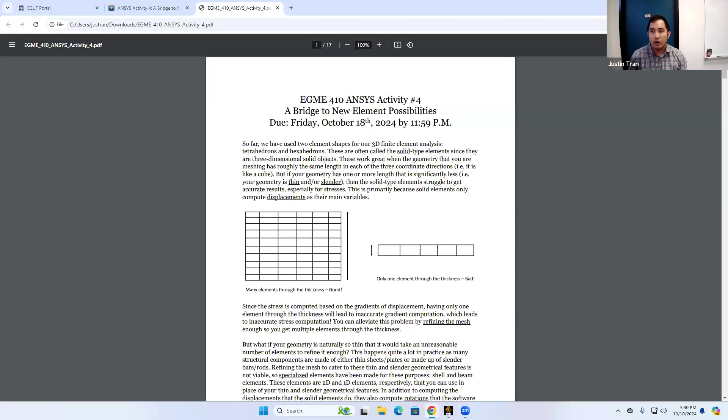As always, the instructions for this activity are available on Canvas. If you haven't done so already, go to Canvas, and you'll see that activity 4 has been activated. You can go and download the instructions, and you're going to need the CAD file too. For this one there's just one file: the bridges file, Bridges.igs.

So we're going to start like we usually do. We're going to open up ANSYS Workbench, and just like we did before, we're going to open up a static structural simulation. We're going to take static structural and move it over to the side, and then just like we did previously, we're going to import in our geometry. Right click on geometry, go to import, go to browse, and open up the Bridges.igs file. Everything pretty standard so far.

If you open up this geometry, I'm not going to do it because it takes a while, so let me show you what it looks like in the specifications here. This is our geometry that we're going to be working with. It's basically just a very basic kind of bridge. We have a road that's in black right here, and all the supporting beams and supporting structures for the bridge are going to be on this side. If you look at this geometry, you can see there's a lot of aspects very similar to what we've been talking about with beams.

For instance, if you look at the road, it's just a very thin plate. It's colored black as if it were asphalt, but it's just a very thin plate. Right now, as it is, it's actually a three-dimensional part, so if you were to try to mesh this, you'd probably mesh it with hexahedrons. But just like we talked about, for a very thin part like this, it really benefits us to turn it into a shell.

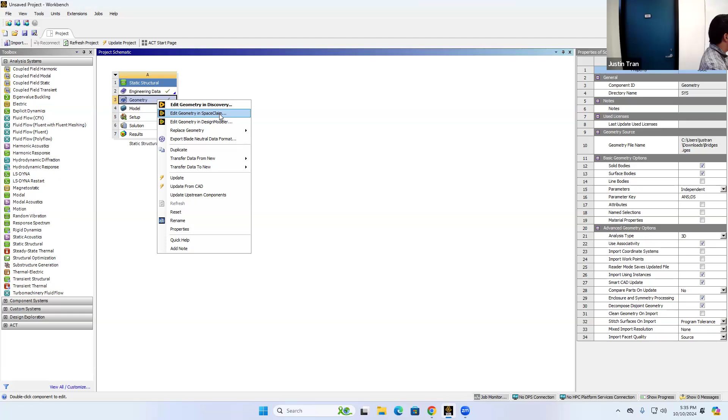Before Discovery came out, SpaceClaim used to be the new and improved CAD software within ANSYS that they were trying to push everyone to use. For this activity, it's the best one we can use to make shells and beams. So let's go ahead and click on Edit Geometry in SpaceClaim, which will open up a new program called SpaceClaim.

I picked this geometry for a few different reasons. The first reason we already talked about - it's kind of perfect for turning into shells and beams because it has a lot of very thin and very slender structures. I also picked this geometry because it's not the cleanest geometry, and you'll see why when we open it up, where the parts themselves don't really fit together all that well.

It's a little hard to tell when you look at the entire geometry like this, but you'll see that once we actually start working with it, there will be some parts that we need to modify and edit, just to make sure it does what it needs to do.

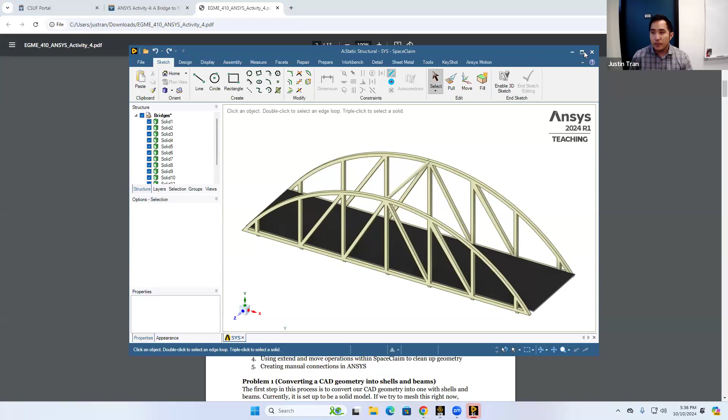If you open up SpaceClaim, you should be able to see the geometry like this. The controls here are very similar to all other parts of ANSYS. If you want to rotate, hold middle click on your mouse and rotate around. If you want to pan, hold control on the keyboard and click the middle mouse button, and you can pan left and right. We'll be using this to modify the geometry.

Any questions so far? Was everyone able to open up the geometry in SpaceClaim? Okay, let's go ahead and get started.

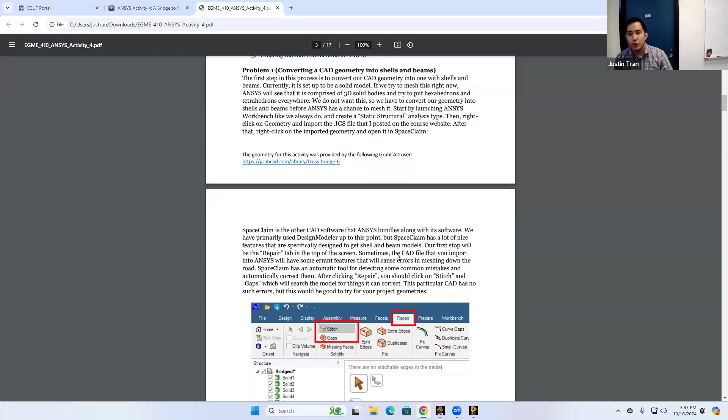There are quite a few steps you need to do in order to prep a geometry for shells and beams. We're going to do a few introductory steps just to make sure our geometry is okay. The first step to modifying a geometry for shells and beams is to try to repair any kind of gaps or holes that you may have in your geometry.

There's a feature within SpaceClaim to do this automatically. If you go into SpaceClaim, down here you can see there is a part of the interface called Repair. We're going to go up there first.

Okay, the first thing we're going to do is click on this button for Stitch. What Stitch is going to do is that if there are any gaps or weird sections of your geometry that don't quite fit together, Stitch is going to catch them and stitch it together into a single body. So you're going to click on Stitch.

After you click on Stitch, ANSYS actually goes and scans the entire part of your geometry to find any problematic areas. In this case, there's no problematic areas for this geometry, so there's really nothing to fix.

But if there were something to fix, after you click on Stitch, this little green check mark here is going to become highlighted. If that green check mark becomes highlighted, you can just click it and it'll automatically repair any gaps you may have in your geometry. For this case we don't have any of those things, so we can just leave it. But it's always good to check, right?

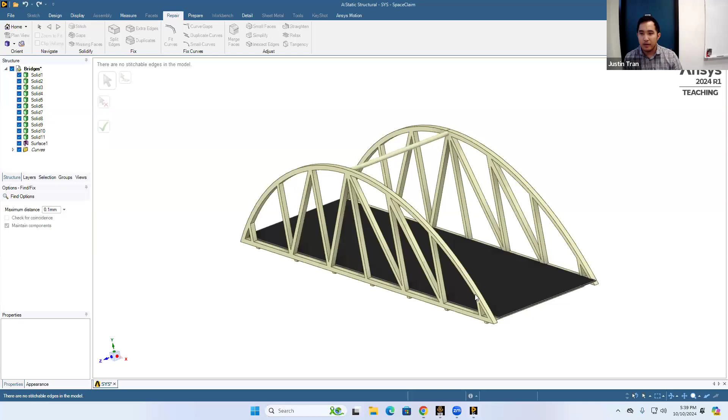So the next thing we're going to do is perform a mid-surface operation. Remember we talked about this on Tuesday. A mid-surface operation is basically the main way that you're going to transform thin parts of a CAD model into a shell. So the way to do that, you're going to come up to the top of the screen here.

There is a button called Prepare, so let's go ahead and click on that. Once you're in that Prepare tab, there's another button called Mid-Surface. If you mouse over the mid-surface operation, it gives you a little tooltip, and you can see it creates a mid-surface from a group of offset surfaces. So let's go ahead and click that.

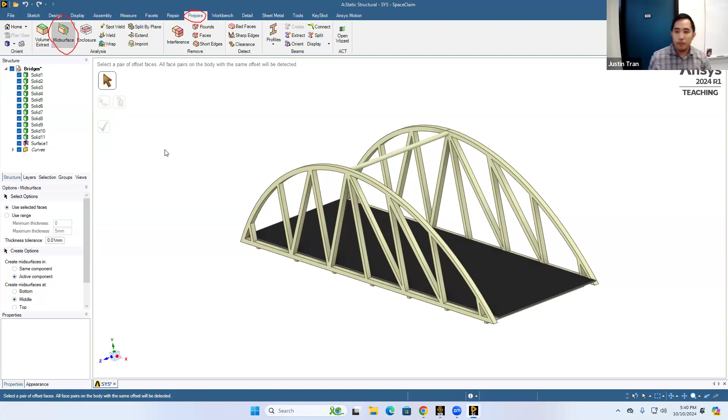Now the next step to create a mid-surface is to select the two parallel faces that you want to delete and replace with a shell. Let's start with the road here, since it's the most obvious thing we can turn into a shell, because you can see it's super thin already. So with the mid-surface operation highlighted, you're going to click on the top of the road.

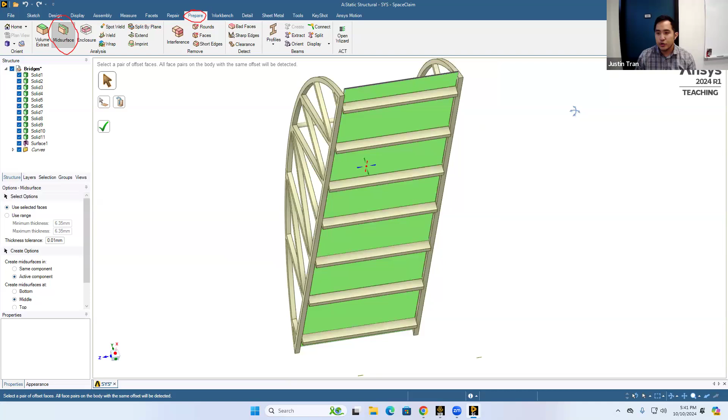It's going to look like nothing happened, but ANSYS did actually log that. With your second click, you're going to click on the other side of the road. You can rotate downwards to make sure you click that one. What should happen is after you click the first one, it should become translucent, and after you click both sides of the road, one side will be blue and the other green. That shows you the two surfaces you want to create a mid-surface from.

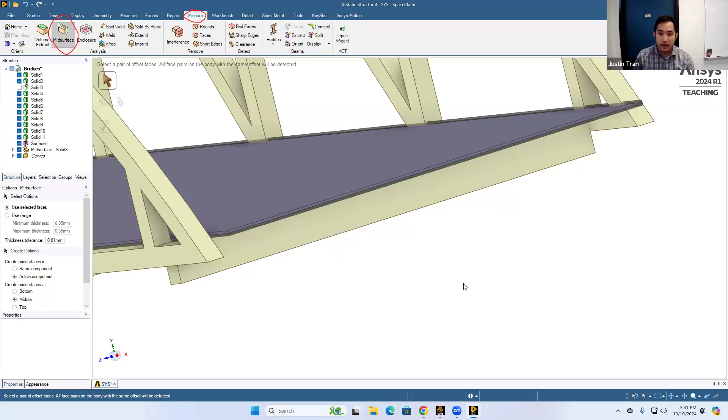And so this is exactly what we want - we want to create a mid-surface from the top and bottom of the road. Once you're ready, go ahead and click the green check mark for create mid-surface. Before you click away, you can see a little bit of the operation that was done. It's a little hard to see on this road just because it's so thin, but what you should see is that we've lost this thickness, and it's now been replaced with the shell.

So if I click away, you can see now that our road is just a very, very thin shell. In fact, SpaceClaim has made the surface kind of translucent to highlight that for you.

Any questions on this so far? Is everyone able to make a mid-surface of the road?

Okay, let's do the same thing with the two sides of the bridge itself. Even though the size of the bridge looks like we could turn these into beams, in this case we're going to turn them into shells so that we can retain as much of the areas as possible. Plus, transforming it from a 3D model to a shell already saves us a lot of cost. So there's no real reason to go all the way to a beam.

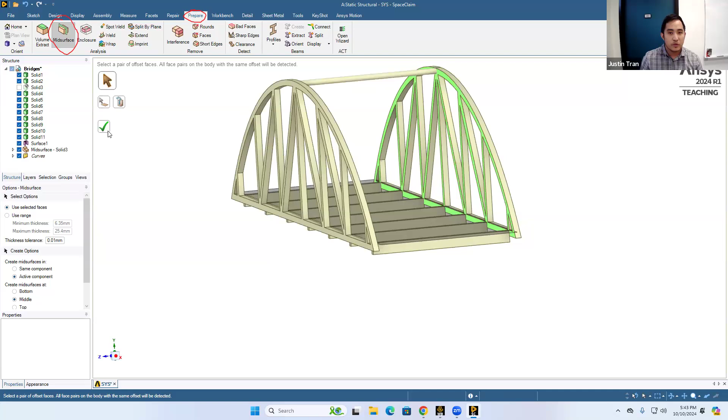Just like I did with the road, I'm going to click on one side of this right side of the bridge, then click on the other side. You can see it's turned blue and green - blue on one side, green on the other. So I'm going to click on the green check mark, and that's going to create our mid-surface.

It's a little bit easier to see once you do it on the side of the bridge. You can see now that our side of the bridge here is a very thin shell, as opposed to having its thickness from before.

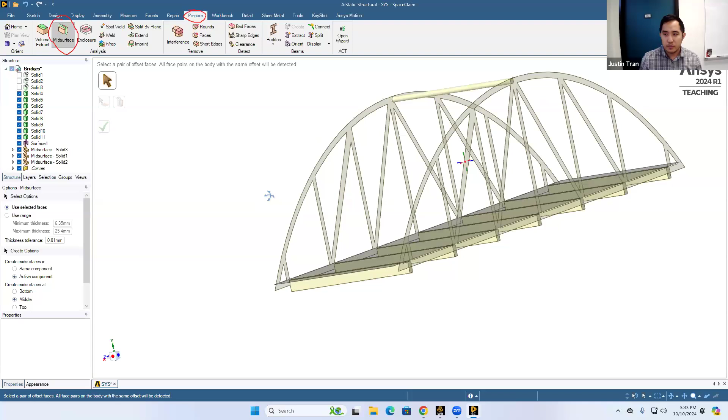All right, we're going to do it one more time on the other side of the bridge. You can see here I've clicked on the inner surface and the outer surface - both of those are perfectly parallel to each other. Then I'm going to hit the green check mark, and now we've turned parts of our bridge into shells.

All right, so that's the easy part so far. Everyone able to get shells on all three surfaces there? Cool, all right. So that's shells in a nutshell.

So now the next thing is we need to transform these slender parts into beams. You can see we have quite a few slender parts here - we have this top beam right here, and I think 7 beams on the bottom.

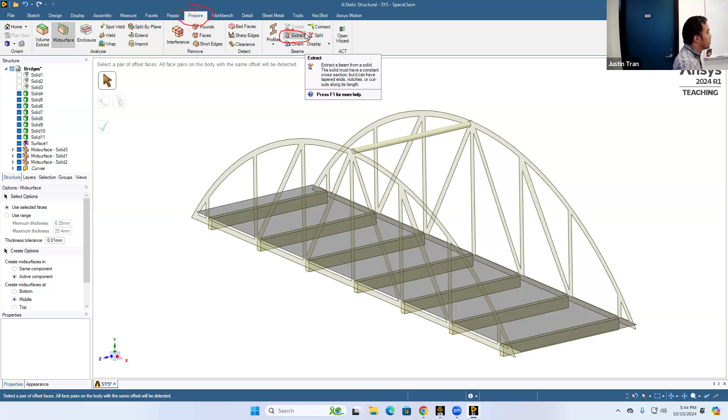To create a beam, you're going to go to the Prepare tab, and there's a small setting here called Extract - we're going to use that tool. If you mouse over that extract tool, you can see that it extracts a beam from a solid. The solid must have a constant cross section, but there are some things you can do with it too, so you can have some tapered ends. So I'm going to click on extract.

Once you click on the extract tool, you basically go into extract mode, and you can check right here - you should see a tooltip that says click a solid to attempt to extract a beam from it. From here it's very easy - you just point to the parts of the geometry you want to transfer into a beam, and click with your left mouse button. You can see after I click this, it transformed into a beam.

You're going to do that for all of the beam surfaces on the bottom as well. Be careful with your mouse - don't click on the road, you don't want to transform the road into a beam. And you're going to do that for all of the supporting beams.

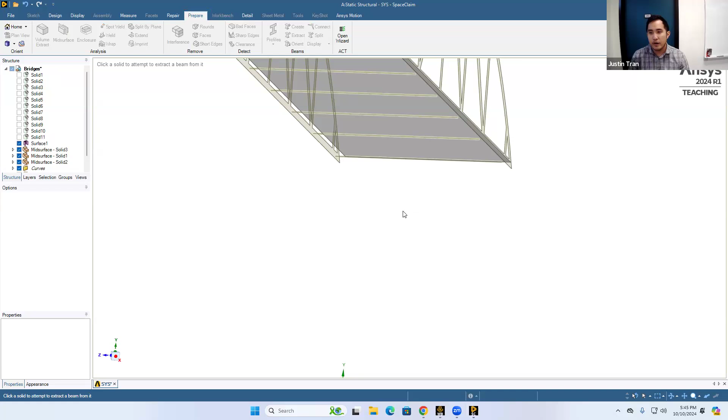All right, so with that, we're done transforming the geometry here. You can see that none of our parts of the geometry have any volume to them at all - they're all either 2-dimensional shells or 1-dimensional beams.

Any questions on this so far? Okay good, all right, so we should be good, right? And we should be able to take this into ANSYS mechanical and start meshing and boundary conditions.

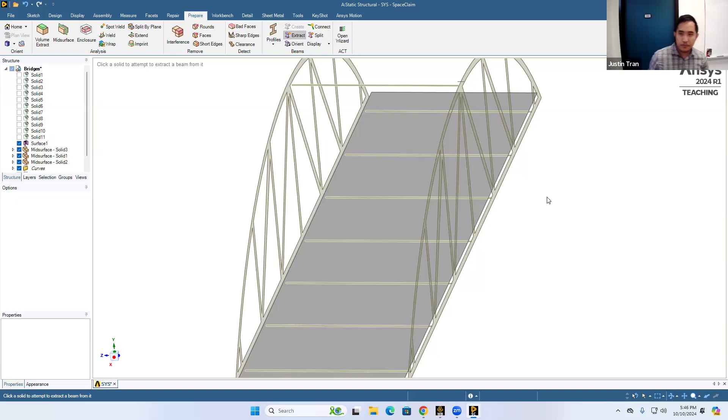Well, not quite. Remember when I mentioned that transforming geometries into shells and beams is going to leave a lot of holes and things to fix in your model. So to illustrate this, let's zoom in on the side of the bridge right here, okay?

Remember, we transform the sides of the bridge by a mid-surface operation. Because of that, we've eliminated the thickness between the bridge and the road, so now we have this big gap. If you zoom around on the bottom, you can see there's a gap as well, so the road is no longer resting on the supporting beams, it's just floating in space. That's not good.

We don't want this. We want to fix this so that all the parts that should be touching each other and making contact are actually doing so. Let's come back to the specifications here.

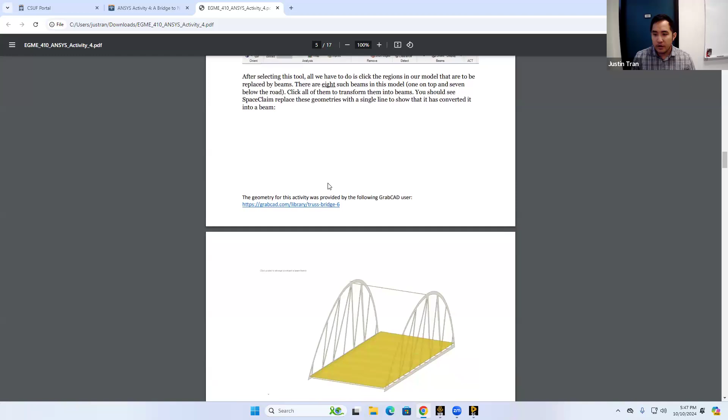There are a few tools we can use to help with this. One of the most useful tools is called the extend tool, which is in this prepare tab. It's right there.

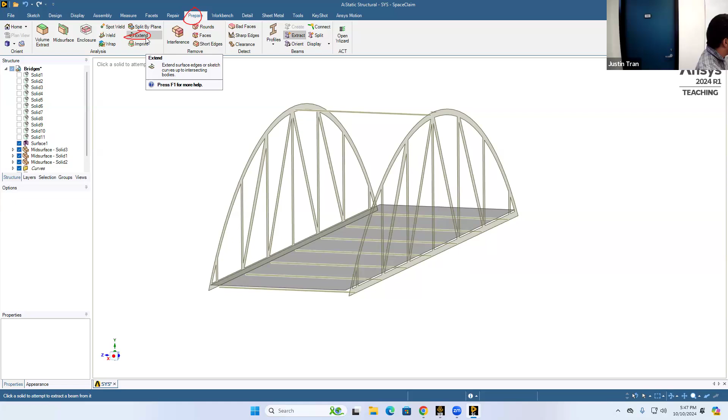What tends to happen a lot when you create shells and beams is that when you eliminate the thickness of parts, the parts are not as connected as they should be. So one easy way to fix this is to simply extend any beams or surfaces to contact anything that it needs to. That's exactly what extend does.

Extend will extend a surface or edges to make sure it intersects with its closest body. Let's go ahead and click extend. You'll see it opens up some options on the left-hand side, and to confirm the extend, we use this green check mark here.

Right now, when we click the extend tool, ANSYS is going to think that nothing can be extended, even though our eyes tell us something different. The reason is that ANSYS is only checking for intersecting surfaces within 10 millimeters of each other, and something has to be within 10 millimeters of contacting something else for this extend tool to work. This bridge is a bit bigger than that, so we're not going to get any extensions from 10 millimeters.

So let's increase this. I'm going to extend the maximum distance to 50 millimeters instead. After doing so, hit enter, and you'll see that ANSYS will suddenly find areas where it can extend the geometry. All these parts where it can extend are highlighted with a little red circle.

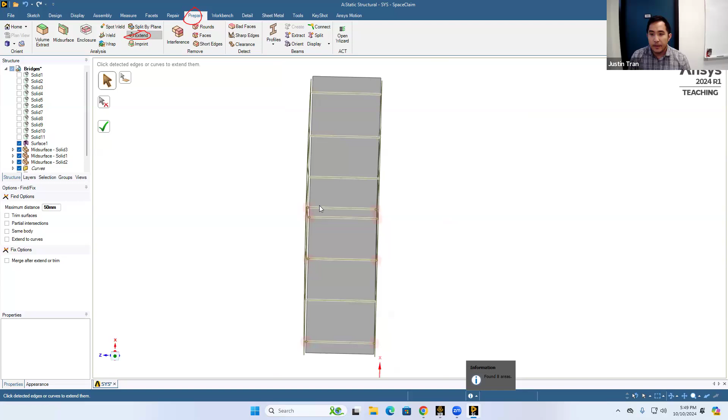Let me give you a good view of this so you can see what's happening. I think that's a good view. Once I click extend, this beam here is going to be extended so that it contacts the bridge, exactly like it was before. I'm going to hit this green check mark.

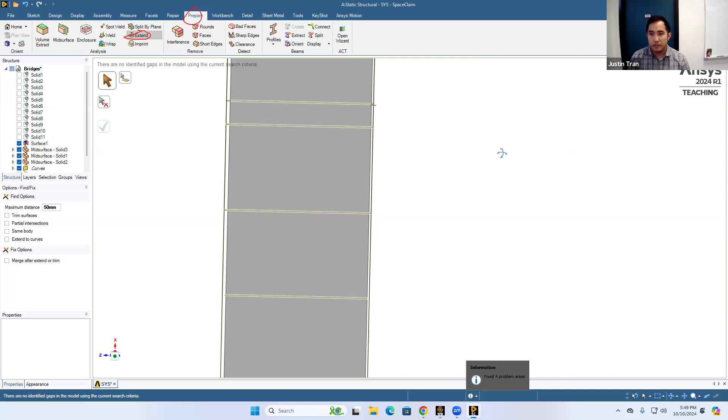After hitting that green check mark, you can see these beams are now extended to hit the bridge. Notice that it only does it on one side of the model, so you have to hit the green check mark again, and that's going to extend it to the other side as well.

So some of our beams are fixed, and now those beams are contacting the bridge again, so those beams are good too. But you'll notice the extend tool didn't work for all of the beams. Let me turn off the road here. To turn off the visibility for a part, you can uncheck it in the project outline, so I'm going to uncheck the road.

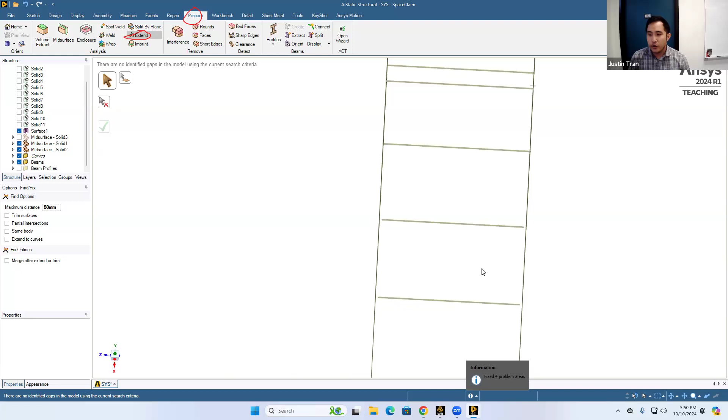We'll bring it back in a bit, but this is just so we can illustrate the beams here. If I rotate the view around, you should see that some of the beams are connected to the bridge as they should be, but some of these beams are not. This beam failed to extend to connect, so it's still floating in midair. So why is it that some of these beams were able to connect to the bridge, but some were not?

To answer that question, let me go ahead and zoom in from this way.

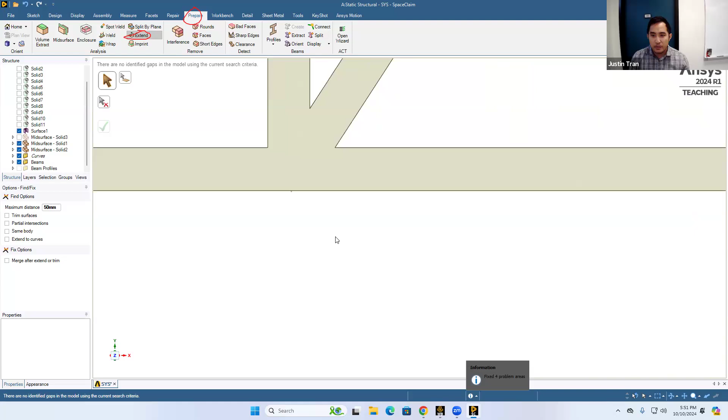So now we're looking at the bridge from the side, and let me zoom into the part on a beam that did not fully connect with the bridge itself. To show you how I'm getting here, I'm focusing on this beam, because that was one of the beams that was not able to extend and connect to the bridge.

Let me clear this and rotate around to zoom in on this beam. When you zoom in really close, we're looking right down the barrel of the beam, and you can see there's a gap between the beam and where it should contact the bridge. It's not that big, so you can only really see it when you zoom all the way in. But the fact is, this beam was not perfectly aligned with the bridge to begin with.

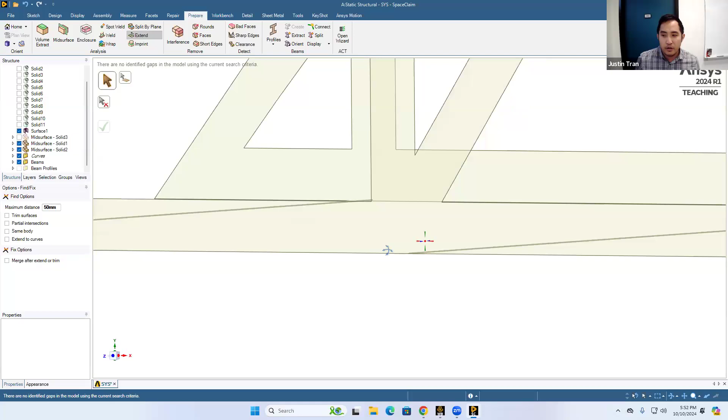Before, when this model was a 3D solid model, it kind of masked this fact because the beam had its own thickness. But now that we've transformed the beam into a one-dimensional structure, this gap is all the more important. So right now we're not able to connect this beam because it's not even in line with the bridge. What we need to do is move this beam upwards, because we know it should be contacting the bridge, so we can properly use the extend tool. Any questions on that?

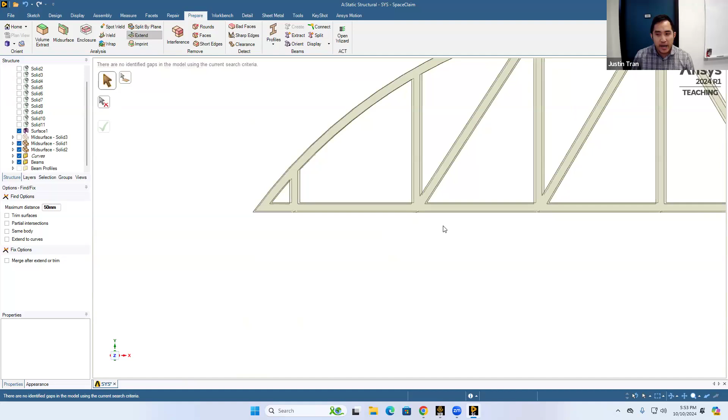This is the part where we need to actually modify our geometry. You can see there are 4 beams that we need to do this for. On my screen, that's one beam here on the left, which is clearly not connected, this one here, and this one here. You can start with any of these — we're going to do this to all 4 eventually, but you can start wherever you want.

So what we need to do is find out how far off we are, because we can see from this view that this beam is clearly not connected and not in line with the bottom of the bridge, but we need to know how far we need to move it up. The nice thing about ANSYS SpaceClaim is that it has a nice measurement tool. If you go to the top of the screen, there's a tab called Measure, and we want to measure the vertical offset from the beam to the bottom of the bridge.

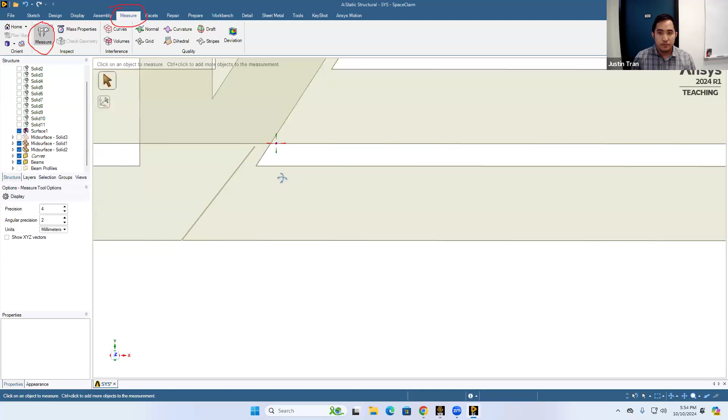To do that, you use this measuring tool — click Measure, then click on both structures: the beam itself that you want to move. When you click on the beam, it gives you the length, which is 3175 millimeters. But we want to find out the vertical distance between this beam and the bottom of the bridge.

To do this, you have to be a little delicate. Hold Control on your keyboard because you want to select multiple surfaces. After you've selected the beam, hold Control and click on just the bottom edge of the bridge — you don't want to click the entire thing, just this bottom edge. That will open up this measurement window right here.

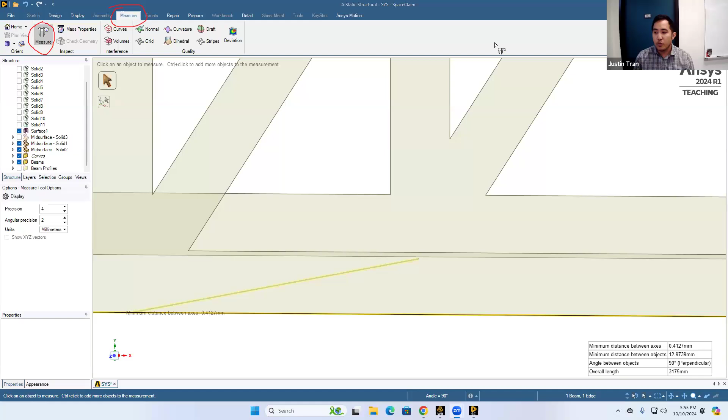So it's going to tell you some of the distances measured, but in particular we want to know the y distance, the y offset. The y direction you can see is vertically upwards.

To show the y offset, with the measurement tool highlighted, come to the left-hand side of the screen, and you can see there's a setting for show XYZ vectors. Let me go ahead and do that.

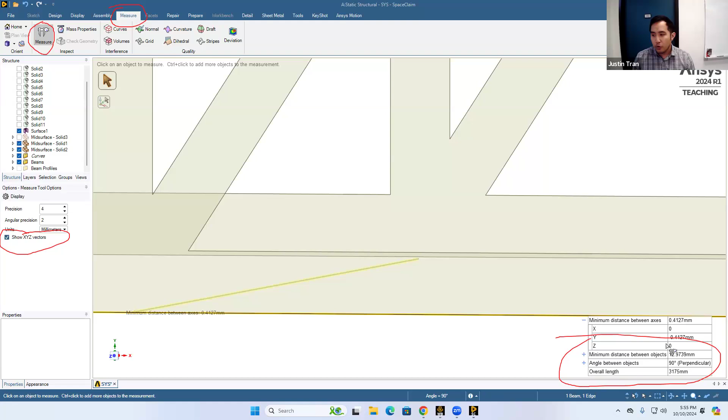After you select that XYZ vector, let me clear my drawings here so you can see that the vertical offset between these two is about 0.4127 millimeters. So it's very close, right? It's less than half a millimeter away, but we still need to move it up.

Any questions on how we measured the distance? Kind of the unfortunate thing about this CAD model is that all of the beams are all slightly off by a different amount, and so we have to measure all four of those beams. We're going to have to repeat this a few times.

Okay, now we know the amount that is off, so let me go ahead and write it down, in psychopath handwriting on the screen right here. We know that the vertical distance between the beam and the bridge right now is 0.4127 millimeters. That means we need to move this beam upwards by at least this amount.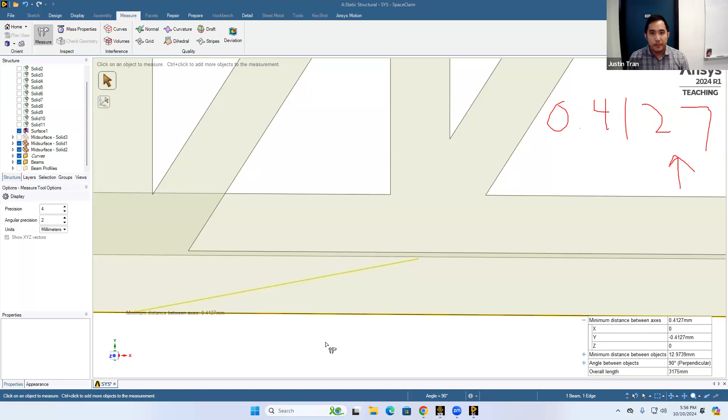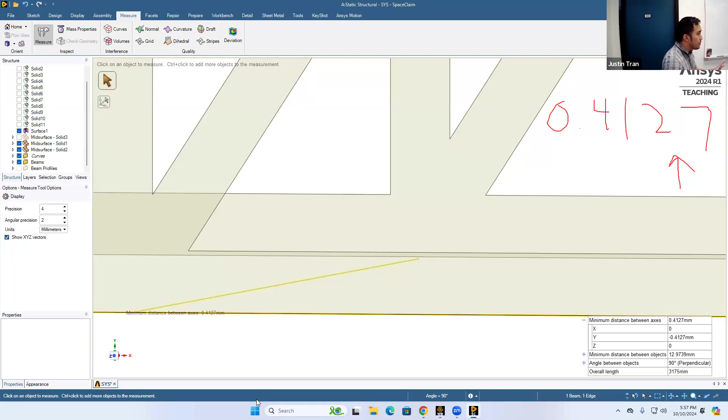To do this, you have to be really careful here because we're going to actually be modifying the CAD file now. You want to make sure you're only modifying the parts you want. In this case, the part we want to modify is just this beam itself, but you want to unclick the bottom of the bridge. We want to keep that the same, so we don't want to touch it. The only thing we want to change is moving this beam upwards.

So you want to make sure that you unhighlight everything. Click in an empty space, and by doing that you deselect everything. That's really important, make sure that you do that.

We go ahead and move to a better view here. Make sure you don't lose track of the beam that you want to move upwards. So the next part here, we're going to go to the top and click on design.

This design tab is going to let us move different parts of the geometry around to suit our needs, and in particular the tool we're going to use is this move tool right here. If you highlight over this move tool, it's basically going to let you select an object and click on an axis to move it around.

We only want to move this beam in the Y direction, so we're going to click on move. Click on the beam that you want to move here, and make sure you select the entire beam—be careful, don't just select the ends, make sure you click the entire body of the beam itself. Make sure that entire beam is highlighted before you start moving.

The direction we want to move it in is the Y direction, so I'm going to click on this blue arrow, because this blue arrow is in the Y direction we can see here. You click on the blue arrow and drag it up a little bit, and you can see by dragging it up and down you can move this beam as much as we want. We only want to move it up 0.4127.

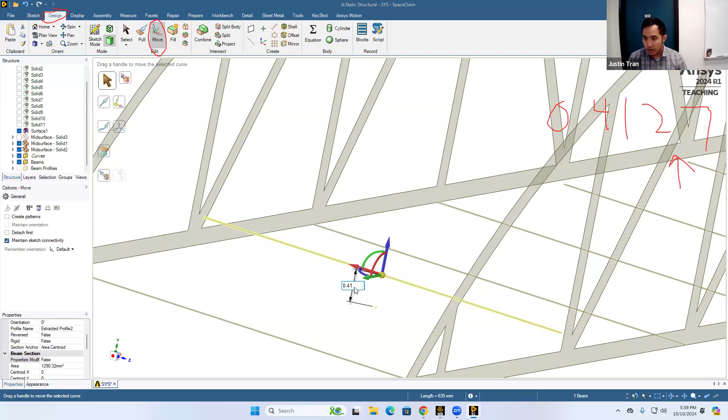I'm going to round up a little bit, because we want to make sure that we're at least intersecting the bridge, so I'm going to round up the amount that we're moving up. I'm going to move it up by an amount of 0.413, and hit enter.

And so that moved this beam up very slightly so that it's now intersecting with the bridge itself.

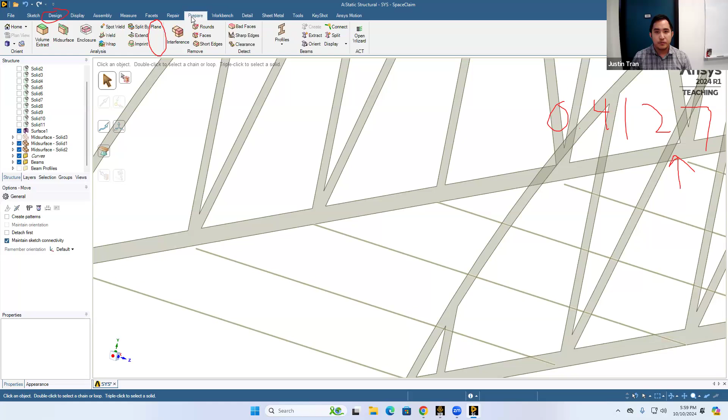To check that your movement was successful, go back to the Prepare tab and click Extend. After clicking the Extend tool, you should see that the two ends of the beams you just moved up are now highlighted because they can now intersect with the bridge itself. I'm going to click on this green check mark, click it twice. So now that beam is exactly where it needs to be, intersecting with the bridge, since we moved it up.

Any questions on this part? All right, go ahead and do that for the other 3 beams. The next part is to make sure all 4 of these beams are connected. We did 1 together, so there should be 3 left. Go ahead and do that on your own. I'll make my rounds now, because this is the part where things get a bit confusing, so if you're having trouble, raise your hand and I'll come help.

Make sure you measure every single one, because every single one is off by a different amount.

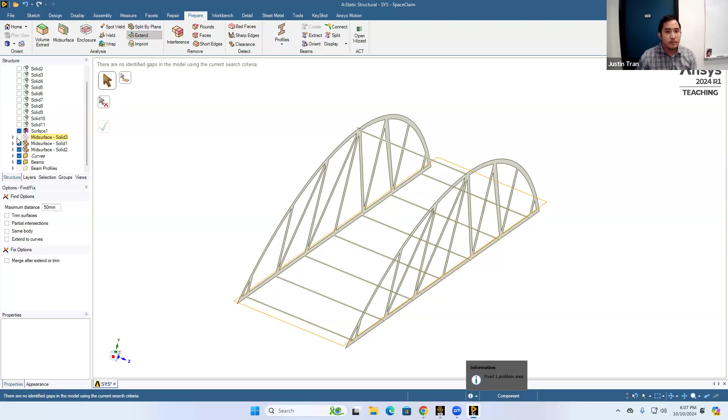All right, so our geometry here is in much better shape than it was before, since all the beams are connected like they should be. So the last step here is to make the road connected as well. The road you can see here is floating on nothing, with quite a big gap between the road and the beam itself. So we need to move the road downwards a little bit so that it's sitting on the beams like it should be.

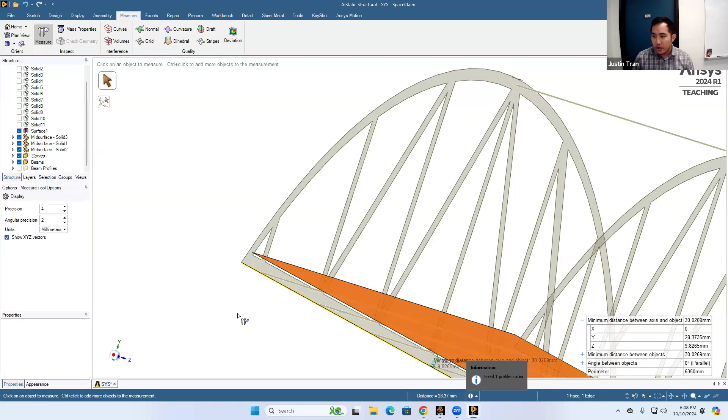Let's use the same procedure as before: let's measure how far off we are by hitting the measure tool. I'm going to click on the road itself - it doesn't matter where on the road you click, since it's just a two-dimensional surface now. I want to align this road to the bottom of the bridge, because that's where we lined up all the beams. So I'm going to hold Control on the keyboard and click on the bottom of the bridge. You can see here that the road is off by about 28.37 millimeters, so we should move it down by about this amount.

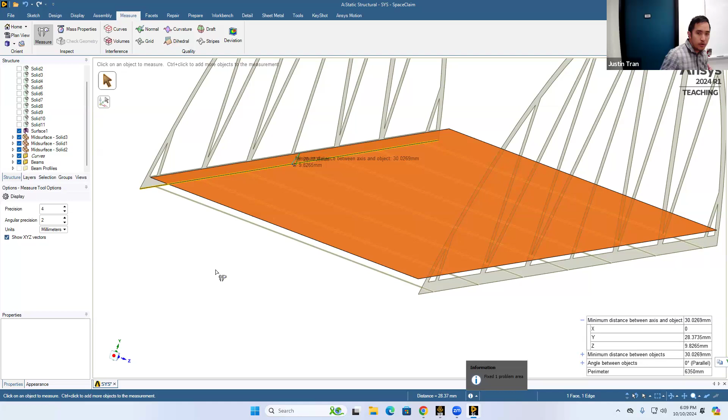This one you want to be a little careful with, because whenever you're moving things around in your CAD model, you want to be aware of which direction you're moving towards. When we moved the beams upwards, I rounded up a little bit to make sure the beams had enough clearance to intersect with the bridge, because they were below the bridge and we had to move them up to be even with it. For this road, we're coming from the opposite direction, so if we move it down too much, we'll have the same problem as before.

So let's say, for instance, we moved it down by an amount of 28.4 millimeters. If we move it by 28.4, the road is actually going to be below the bridge, and we'll have the same problem as before, where the road won't be able to connect with anything - it's just on the wrong side of the bridge. So in this case, I actually want to round down a little bit. I'm going to move it down by an amount of 28.37. Let me write that down so I don't forget.

Okay, so just like before, let me click on an empty space here just to clear the selection. I'm going to go back to the design tab and hit move.

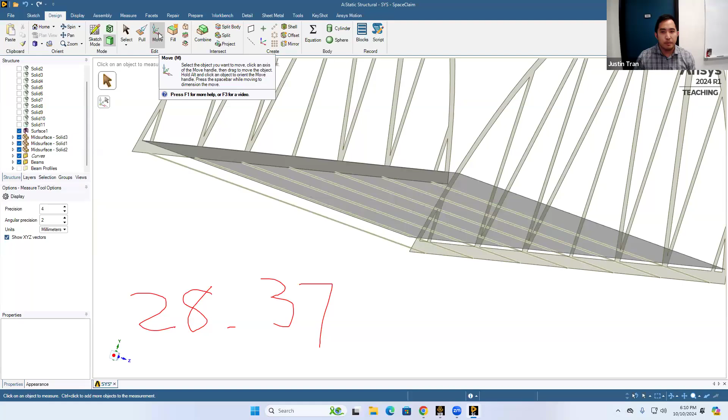Now you want to move the entire road, so make sure you have the entire road selected. Click on the blue arrow, move it downwards, and enter manually 28.37.

Okay, so now the road is moved downwards. You can see now it's basically in the same plane as all the beams.

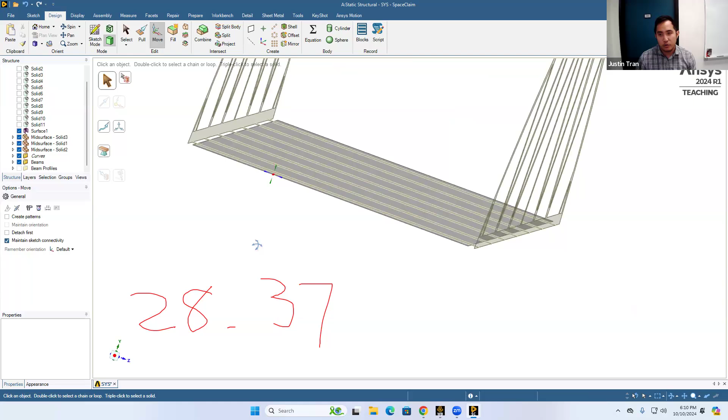Let's do one last thing before we jump into mechanical. Let's extend the road. I'm going to go back up to prepare and extend. After doing that, you should see that the two sides of the road are highlighted now because they're in line with the bridge. I'm going to hit the green check mark.

And so now the road is properly extended to the sides of the bridge. In the end, your geometry should look like this. All the parts have been transformed into shells and beams correctly, and everything that should be connected is now connected. All the beams are connected to the bridge, the road is sitting on the beams, and the road is connected to the two sides of the bridge as well.

All right, any questions on this? Everyone was able to get this geometry to look like this? You moved the road to the edges of the bridge, so yes, everyone's road should be the same. The road should move down by an amount of 28.37.

Cool. All right, and so if your geometry looks like this, we are ready to move on to the next step. And so the next step is going to take place in ANSYS Mechanical.

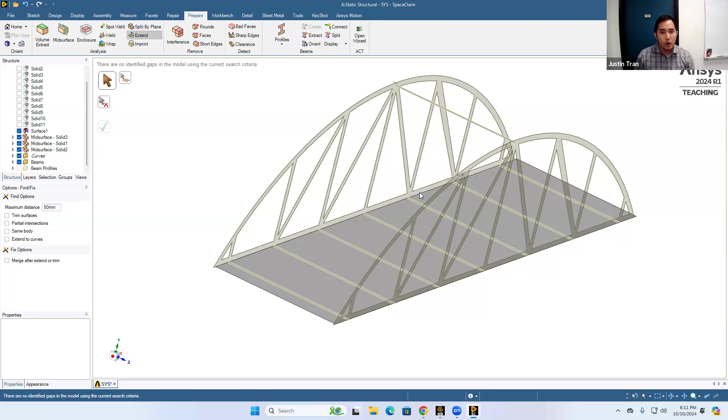So let's go ahead and close out SpaceClaim. Don't worry, all the changes to your geometry have been saved. You don't need to actively save it yourself. So go ahead and close SpaceClaim, or come back into Workbench, and we're going to double click on model here to open up ANSYS Mechanical.

So the next thing we're going to move on to is, well, eventually we're going to do the meshing and the boundary conditions, but first we have to make sure we fix the connections.

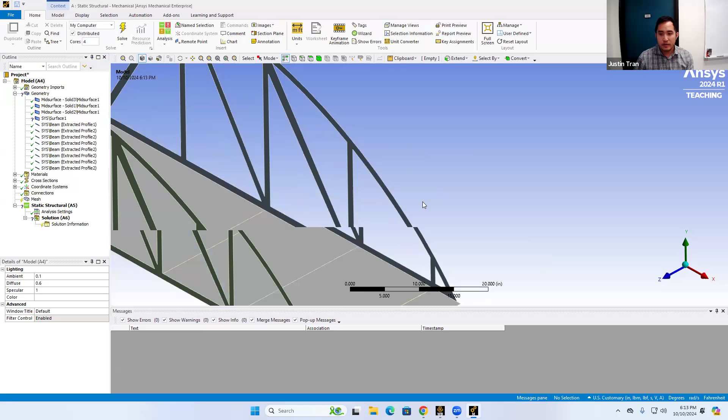All right, and so if you open up ANSYS Mechanical, you should be able to see the bridge that you created. It should be the version of the bridge where you transformed everything into shells and beams. This bridge is going to be really efficient to mesh, and you're actually going to see that when we get to the meshing, it's going to look really good, with very few elements in your mesh.

Okay, I'll give it a couple more seconds, just because that took a while—probably you guys here are taking a while too.

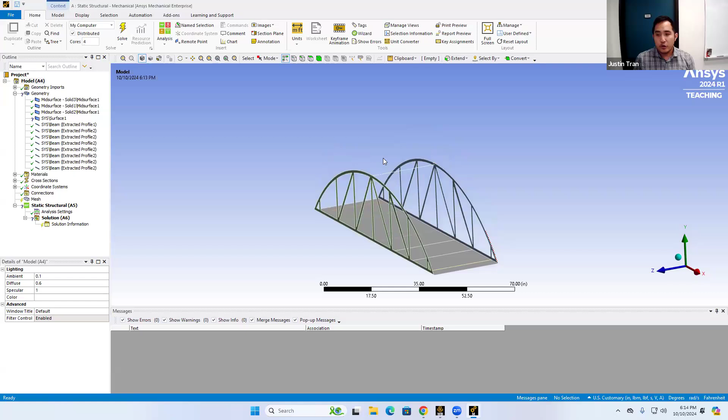So once your bridge is loaded in, you should see that every single shell and every single beam that you created is listed as a separate part in the project outline. This is the most parts that we've had in an activity. Last activity with the signpost, we only had 3 parts: the sign, the post, and that additional surface. So this is a lot more parts than we're used to working with.

One thing you should notice is that there's one part right here that has a question mark, called sys surface 1. If you're wondering where that is, there's an awkward part of this bridge up here, which almost looks like a chopstick that someone dropped and it's just balancing perfectly on the bridge. This is just an artifact from the modeling.

So if it wasn't clear already, this CAD model was kind of clumsily put together, and it wasn't properly dimensioned, as you can see from the beams. This is just another artifact of that.

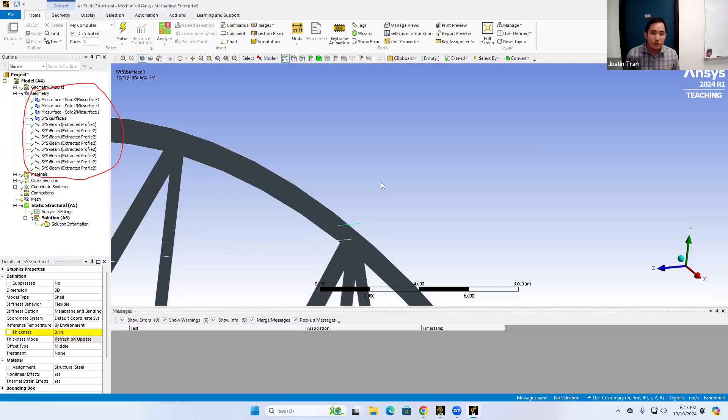We don't need this in the model because this part of the bridge isn't going to be bearing any kind of load, so we can suppress it. I'm going to right click on this surface, the only part here with a question mark, and suppress this body to basically get rid of it. Make sure you do that, otherwise your model will have a hard time meshing.

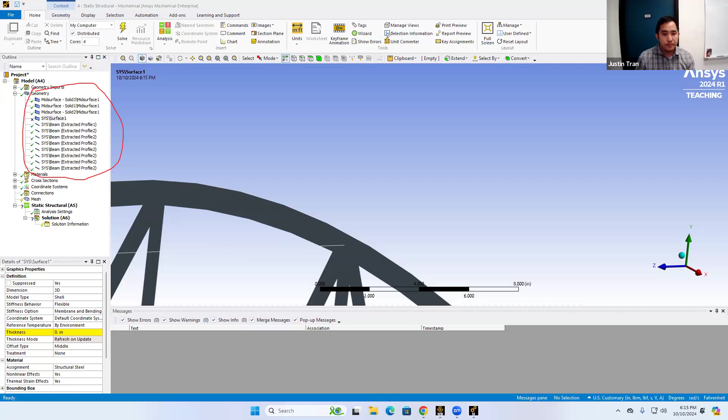At this point we have a familiar situation: our CAD model is all prepped, so we can now go to mesh and generate one just to see what it looks like, using the default settings for now. If you did everything correctly, the mesh should generate quickly. My default mesh here has only 517 elements, which is great because we went through all this effort to transform this geometry into shells and beams, so it makes sense that our mesh is very efficient.

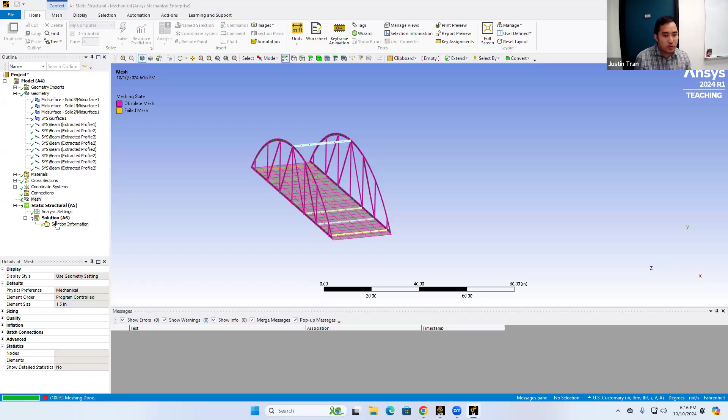We can make this smaller. The default mesh size is about 3.6 inches, so let's reduce it to 1.5. Even with this smaller element size, we still end up with a very modest mesh - the number of elements is only a little less than 1900. We're getting meshes that look very nice. So let's make it even smaller, down to 0.5.

This is the main benefit of using shells and beams - since you've lost that third dimension, you no longer have a thickness or cross-sectional area, so you can make your elements as small as possible for really nice results. With a mesh size of about 0.5 inches, really pushing it here, our element count is about 14,000, which is still very modest in the grand scheme of things. You can see we've done a really nice job with the mesh.

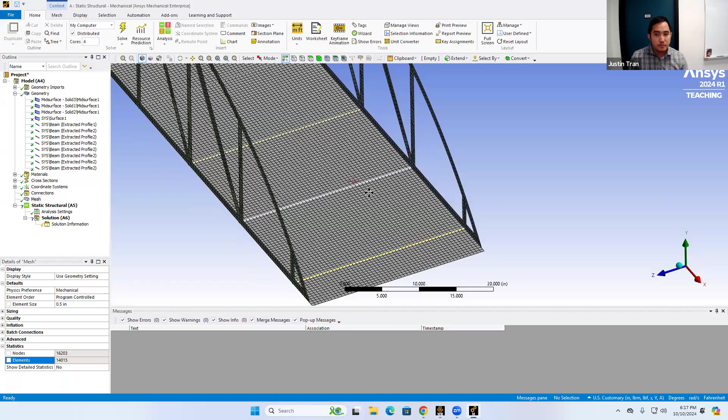So that's great, we're in a really nice position for our simulation. We've taken a geometry that normally would have been very challenging to mesh with traditional tetrahedrons and hexahedrons, and turned it into a very elegant shell and beam mesh. From here you can add boundary conditions, run the simulation, and add result fields to look at. But there's one thing we need to do before that.

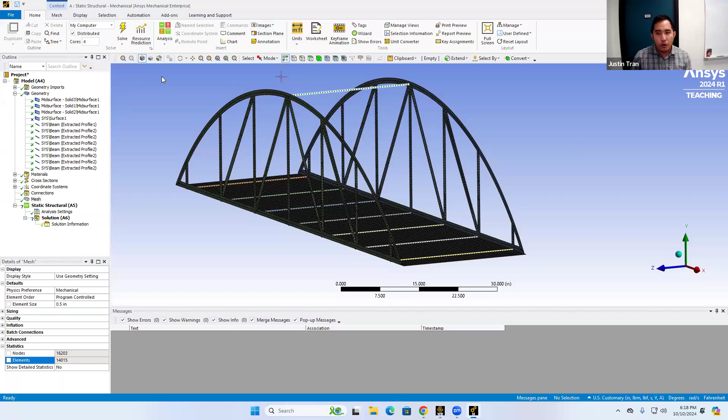We've done some pretty extreme modifications to this CAD file. All the previous connections - parts that were normally bonded together in the assembly - we've lost that information. Now we've repaired the geometry so everything that should be touching is touching, so from a geometric point of view the model is in good shape. But ANSYS doesn't know these parts should be connected since we modified them manually, so we need to specify that to ANSYS. Even though these parts are geometrically close, in the finite element simulation they're not fixed to each other at all. So if you applied a force on this road, it would completely detach from the bridge and the beams, and you'd just get a bunch of crazy results. We need to set these connections.

To set connections on your model, go to the left-hand side of the screen where there's a button for connections. Right-click on connections, and then insert.

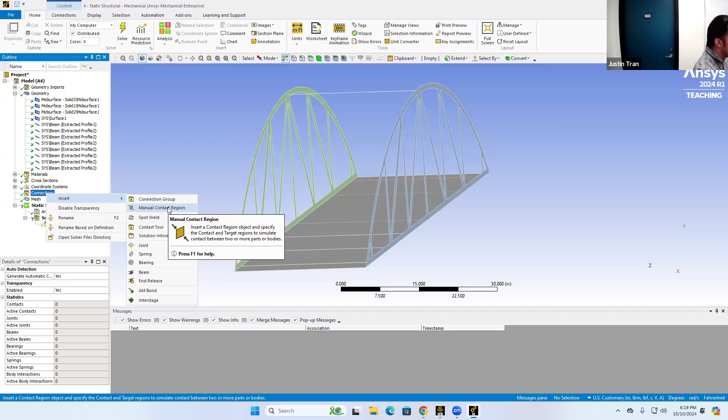And you want to insert a manual contact region. What the manual contact region is going to do is allow you to select two parts of a part, I should say. And then you're going to be able to form a connection between them to tell ANSYS that these parts should be bonded together.

Okay, so let's go ahead and do this. We're going to need to do this a lot, so there's quite a few connections that we need to make. First connection that we're going to do is let's go ahead and bond the road to all of the supporting beams, because ideally this road should have its weight supported by all of the beams below.

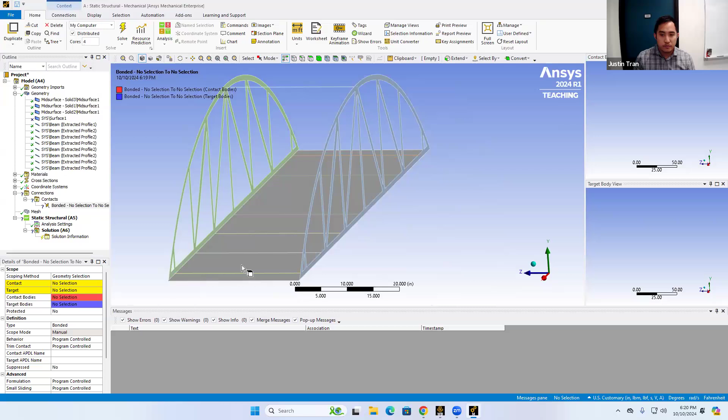So let's go ahead and select the road. Make sure the road is selected there. And on the left-hand side of the screen here, you should see that from the settings on the connection that we're making, there are two things that we need to specify: we need to specify a target surface and a contact surface.

So for this road here, I'm going to set it to be the target surface. With the road selected, you're going to click on target here, and click on apply. And that's going to set the target to be one face, that one face being the road.

And then for the contact, we're going to select all of the individual beams right here, so the beams should be bonded together with the road. Now if you're having trouble selecting the beams just because they're kind of right next to the road here, it may help to change the selection mode within ANSYS.

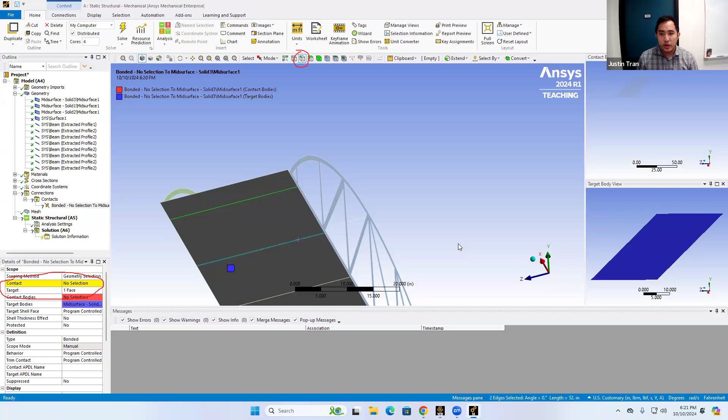All the beams are considered edges here, so you can click on this edge selector, click on edge, and go ahead and click on all the beams here. You want to select all of them, so make sure you hold down Control on the keyboard and click on all the beams. There should be 7 of them, so make sure you click all 7 beams.

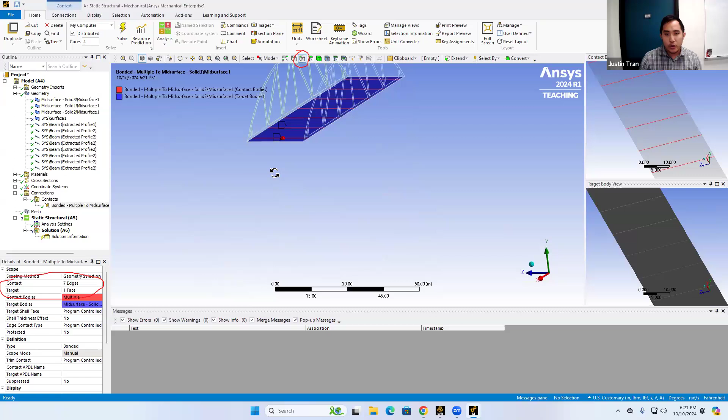And then you're going to apply that onto the contact. Hit apply. And so with that, we formed a bonded connection between the road and all of the supporting beams. Okay, so that's step 1. Step 1 is to make sure that we connect the road to the beams.

Now we've selected this in a way where we've set the target as the road and the contact as the beams, right? And so the first question to ask is, does it matter which is which? Because ultimately we're making a bonded connection between the two. And so it doesn't matter as long as we have everything selected, it seems like it shouldn't matter, right? But there's a reason they call these two things different.

So for a simplified explanation, whatever surface or whatever body that you select as the target, you generally want that to be the bigger of the two surfaces.

So it's a little bit hard to explain why this is without getting into the mathematics. But when you're forming connections or contacts between two different entities in a finite element simulation, you need to have some kind of anchor, basically, and the anchor is the target. So whatever is the larger of the two surfaces, or the larger of the two bodies that you're trying to connect, you want to select that one to be the target.

So in this case, where we're selecting the road and the beams, the road has a much bigger surface area than the beam itself. And so you want to make sure that the road is selected as the target. Just kind of keep that in mind as we set the other connections in terms of which one should be the target and which one should be the contact.

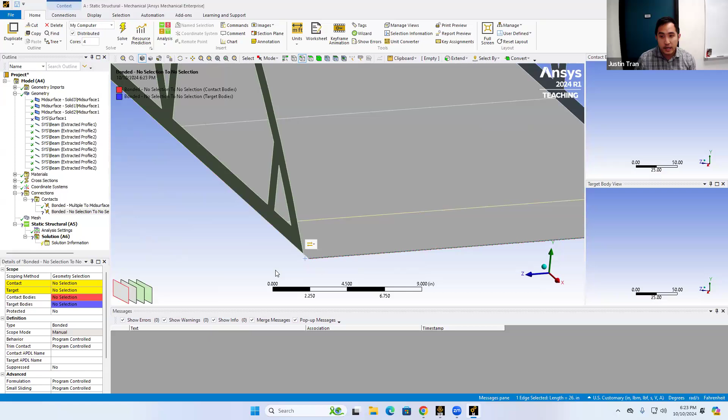Oh, not that edge, let me go to the other side. It may help to hide some parts if you're having a hard time clicking on the correct edge. But the edge I want is this one for the road. Oh, that's for the bridge.

This one's a little tricky because the edges are kind of on top of each other, but there's a section of the road here that overspills past the bridge.

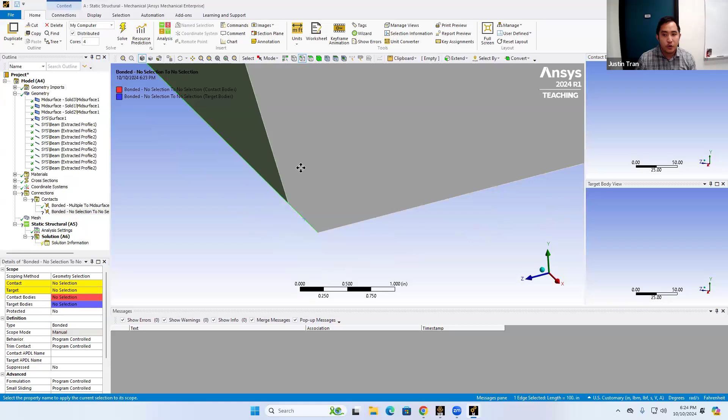So you want to use that to make sure you're selecting the edge of the road itself. This edge of the road is going to be the smaller of the two surfaces, so I'm going to set this to be the contact. And then the target we want to bond this to is the entire side of the bridge.

I'm going to click on surface selecting mode, or face selecting mode, and click on the entire side of the bridge, just like that, and set that to be the target. So now the side of the road is bonded to the side of the bridge.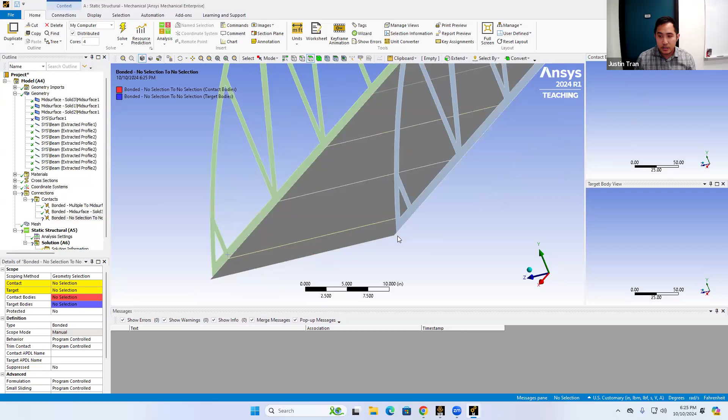I'm going to do the exact same thing on the other side. I'm going to create another manual contact region. Once again, let me select the side of the road here, and use face selection mode. I'm going to select the side of the bridge.

Now we formed a connection between the roads and the bridge itself. There's one more connection we need to make here - technically two connections. We need to make sure the sides of the beams are properly bonded to the bridge itself.

I'm going to create another manual contact region. Since we're in face selection mode, I'll select the side of the bridge and make that the target. So for this connection, we're bonding the ends of the beams to the bridge.

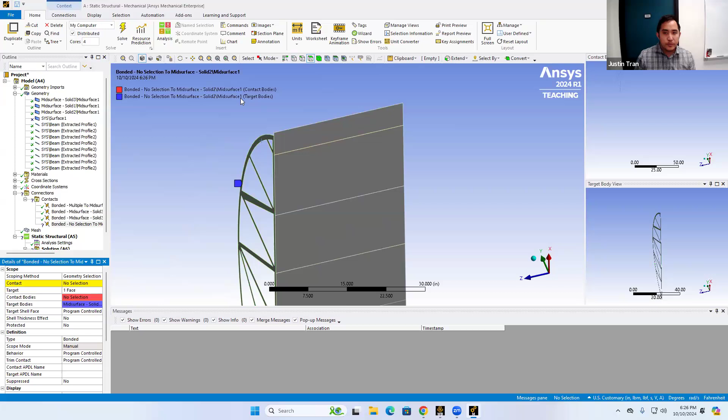I've selected one of the sides of the bridge as the target, and then for the contact, I'm going to select just the end parts of each of these beams. For this, you almost certainly have to click on vertex selection mode, so make sure you have that selected.

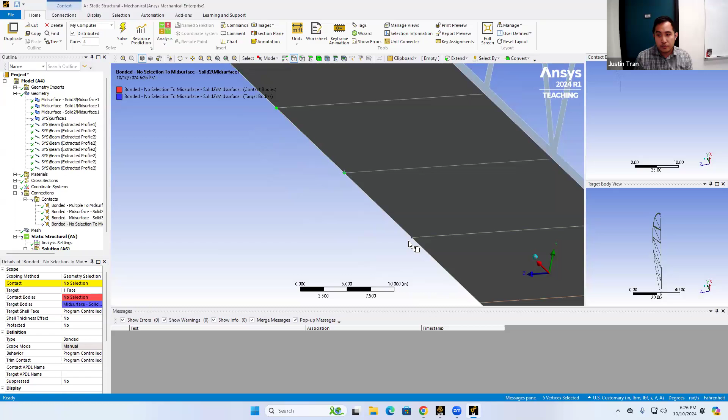You want to click on each of the ends of the beams here. Mouse over each side of each end of the beams, and it should highlight once you put your mouse there. Don't be afraid to zoom in if you need to.

That's 7 of them, but we can't forget there's one beam up top here, so make sure you get this one as well. In total, there should be 8 vertices bonded to one face.

Then we're going to do the same thing on the other side. I'm going to create another contact region and select these 8 vertices first. You want to be careful to make sure you get the end of the beam.

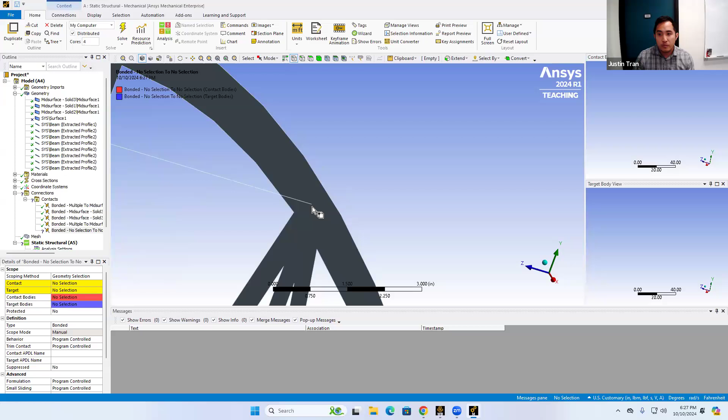It's very easy to mouse over and select one of the corners of the bridge itself, so you don't want that - you want to make sure you're selecting the end of this beam, just like that. So I'll do the 7 on the bottom here. It's a little annoying sometimes to get the right one.

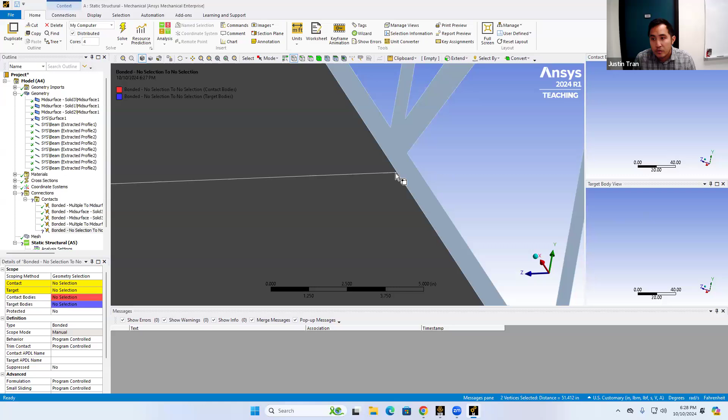Take your time with this - I'm just going a bit faster because we've done this before.

And for the side of the bridge, make sure you select that.

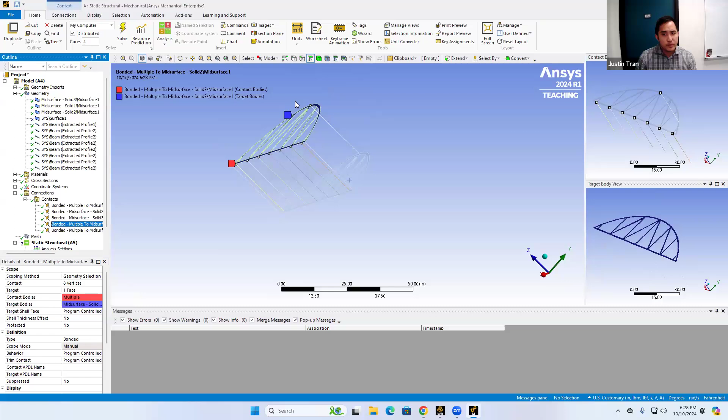In total, you should have 5 manual contacts: a contact between the road and the beams, between the side of the road and the side of the bridge, the other side of the road and the other side of the bridge, all the beams to one side of the bridge, and then the other sides of the beams to the other side of the bridge. So you should have 5 surfaces or 5 contacts in total.

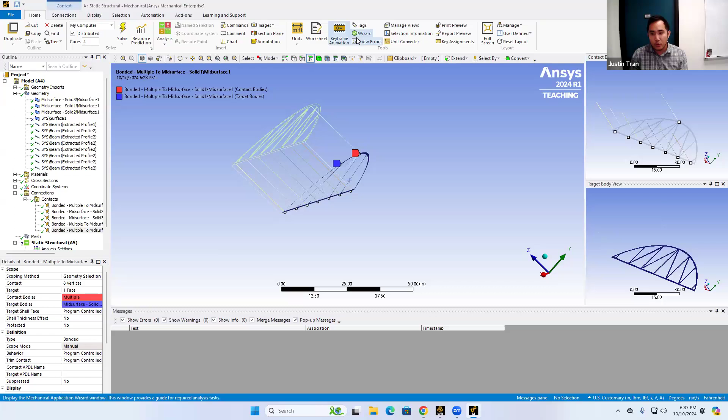Okay, I'll go around and answer more questions, but we are almost out of time, so I want to make sure I just talk about the rest of the activity for you, okay? So we've gotten most of the way there - we've modified the geometry, we've added all the connections, and we've even meshed it, which is good, okay? Just be aware that for the homework, I want you to modify the mesh even further - add method objects for the beams, method objects for the shells, and sizing objects, okay?

For loads and constraints, you're going to apply loads on this bridge, so you don't have to be too creative here. It's a bridge, it's meant to hold kind of a vertical weight on top. So for mine, what I did was I applied fixed supports at the ends of the roads, and I just applied a simple vertical force pushing downwards.

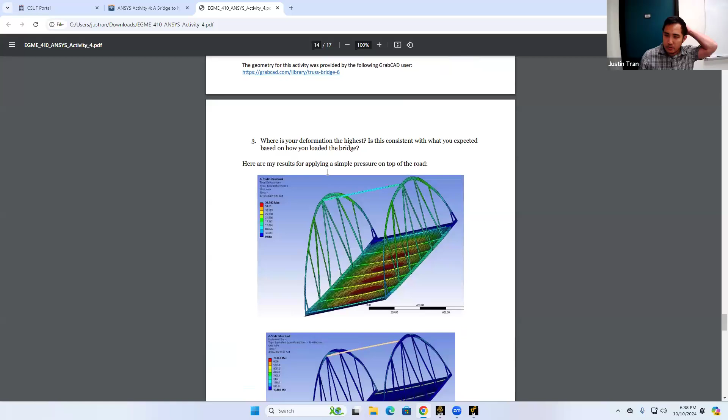Problem 4 is just show me your results from the simulation, okay? So if everything worked out right - if all of your connections are good and all the shells and beams are good, you should get a plot that looks similar to this, where this right here is your total deformation plot, and you should see hot spots of deformation in between the beams. The beams should be doing their job, providing support, and you should only really see deformation wherever the beams aren't. And here's the stress plot.

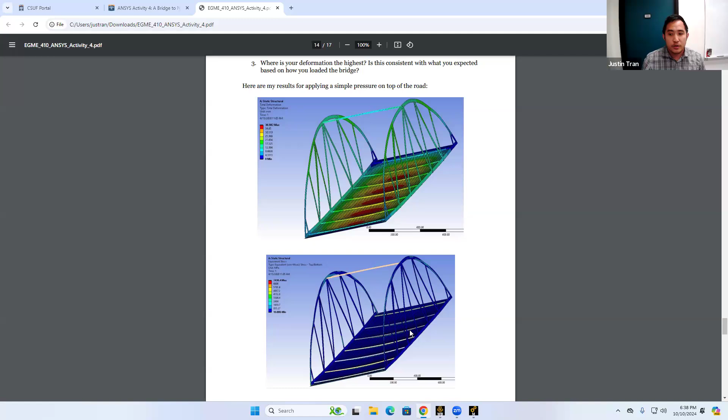Problem 5 is to do a mesh convergence test. Remember, we talked about what mesh convergence tests were on Tuesday. For this one, I want you to run the simulation at different mesh densities and record the results. Ideally, you should get convergence at some point with the deformation.

Problem 6, I want you to try different loading conditions. Just like activity 3, change up the loads a bit, maybe something a bit more creative. I read through a lot of your activity 3s, and I was impressed with the creativity you guys had with that, so that's good.

Problem 7, I want you to repeat the simulation, but for the original geometry, meaning no shells and no beams. What you're going to see is that it's going to be very difficult, if not impossible. Depending on your computer, it may not even be possible. You may try to mesh the geometry and run the simulation, but you may run into an error. I'd say probably about 70% of you will run into that issue. So if you run into an error with problem 7, that's okay. Just report it: say you imported the geometry, this is the best mesh you can do, but when you try to run the simulation, you get this error. That's kind of the expectation there.

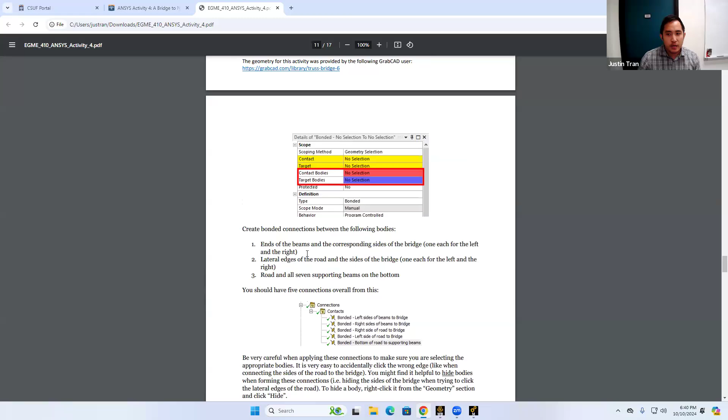And then problem 8 is just the summary, kind of the same as before. So a bit of work with this activity. We did most of the legwork with shells and beams, but there's still a bit for you guys to do at home.